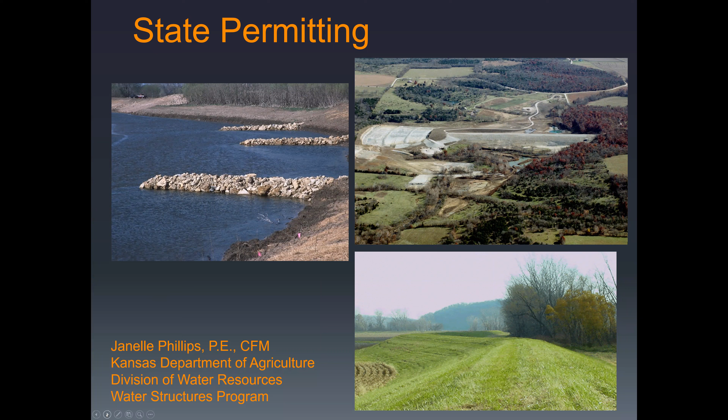So why do we have to have permits? Why do we have to go through this process? There are two laws that the stream obstruction team works with: KSA 82A-301 et al., which is the Obstructions in Streams Act, and KSA 24-126, which is the levee law. Those laws were done at the Capitol. DWR has nothing to do with the laws other than to uphold them.

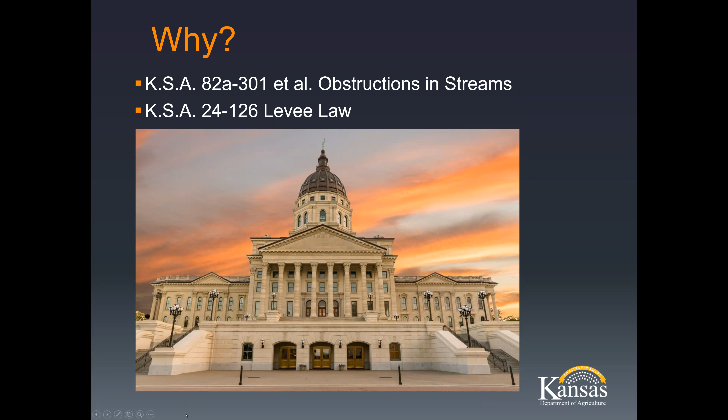So when is a state permit required? For KSA 82A-301 et al., it's construction, modification, or repair of a dam, or work in a designated stream. For KSA 24-126, it's construction of a levee or the placement of floodplain fill within a floodplain.

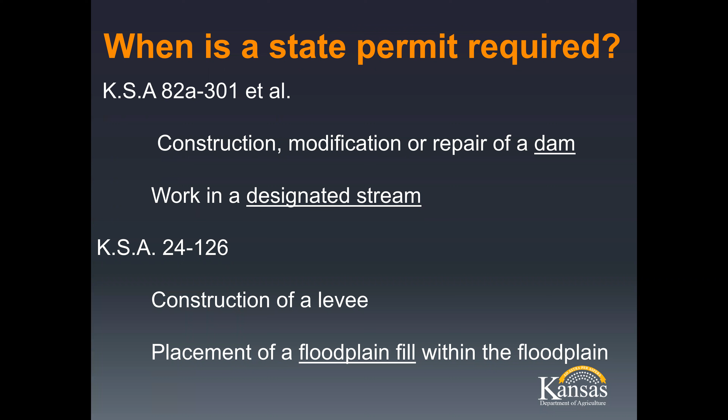So let's start with the definition of a dam. By state statute, KSA 82A-301 defines a dam as a structure that is capable of impounding water and is 25 feet or greater in height, or 6 feet or greater in height and 50 or more acre feet in volume behind the dam. There's a diagram on this sheet, as you can see: the height of the dam is here, and this is how much is behind it.

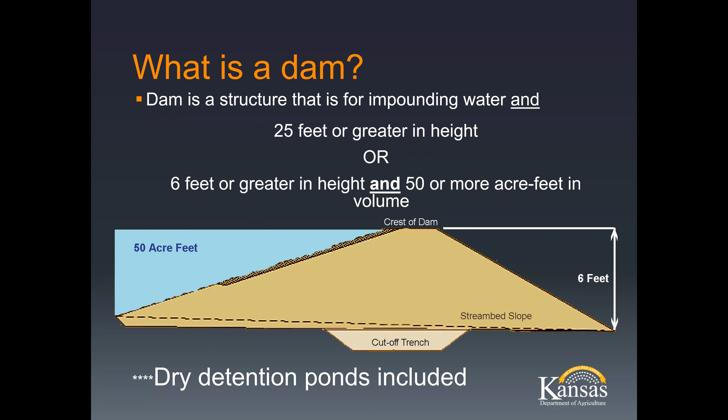For my engineering cohorts, this does include dry detention ponds. So if you are doing a detention pond that will be dry most of the time, but has the capability of holding 50 acre feet behind it, or is 25 feet or greater in height, there is a chance that it is classified as a dam as that is defined.

So what is the difference between a repair and a maintenance? Maintenance is considered removing woody vegetation, seeding and grass, burrowing animal control, replenishment of riprap, and removing debris from the spillway. Types of repairs would be a pipe replacement, a slip line of pipes, embankment modifications, modifications of the dam, or modifying the auxiliary spillway.

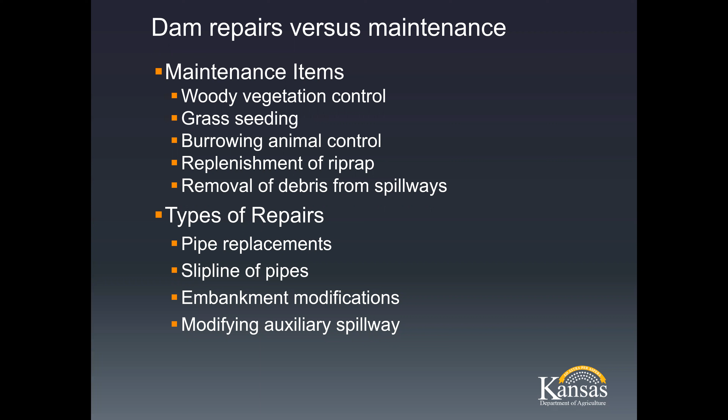So if you have a dam, or someone comes to you and wants to build a dam, the first thing I would say is tell them to get a determination from DWR and the U.S. Corps of Engineers. The second thing I would say is hire an engineer. The reason is, getting permits for dams requires construction plans and specifications by a licensed engineer. So those would be the things I would tell a community to do first: get determinations from DWR and the U.S. Corps of Engineers, and hire an engineer.

In my presentation, I will not go over dam determinations. That is dealt with by our dam safety group, and I think that's a presentation all on its own. But those are the things I would do if someone wants to build a dam in your community.

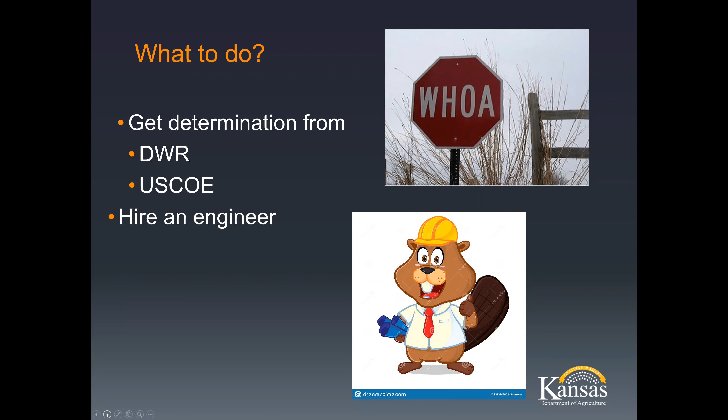Before I go on to anything else, I want to lightly touch on water appropriations. If someone wants to build a pond in your property or community, you should know that anything more than 15 acre feet of storage, or a groundwater well, requires a water appropriations permit. We have 4 field offices for the state of Kansas. So if you know you're going to hold more than 15 acre feet, it might be advantageous for you to contact our field office or our headquarters to ask if a water appropriations permit is required for that particular pond or activity.

So moving on, we're going to talk about work in a designated stream. I think the first thing we need to define is what is a designated stream. A designated stream, outlined in KSA 82A-301, is a natural or man-made channel that drains a watershed of 1 square mile or more in the eastern part of our state, 2 square miles or more in the center of our state, or 3 square miles or more in the western part of our state.

A lot of people ask me, how do I know how much is draining to the area? There is a nifty tool called USGS Stream Stats. You can go to this website, just type in Google USGS Stream Stats, and you can put in the lat long of the location, and it will tell you the drainage area for that location. I will caution you in the western part of the state to take a little more time and look at some USGS maps and other things to make sure it has incorporated everything, but this is a great tool. We use it in our office to find out the drainage area of certain streams.

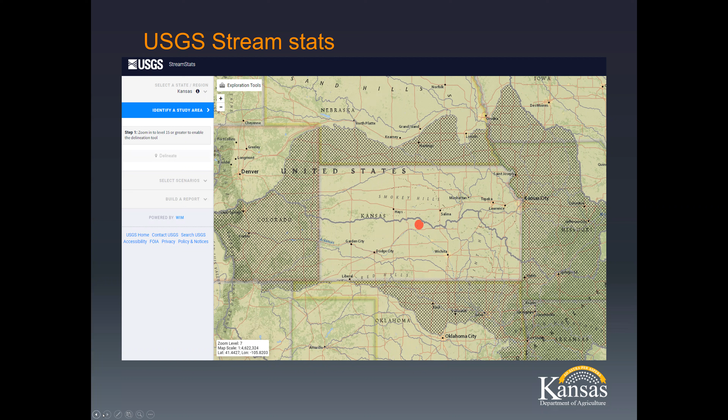So what kind of work? Within the channel of a designated stream, if you construct or modify a stream obstruction, if you modify the stream channel, or if you remove aggregate, gravel, sand, rock, rubble, or dredge within the stream banks, you will need a permit from DWR.

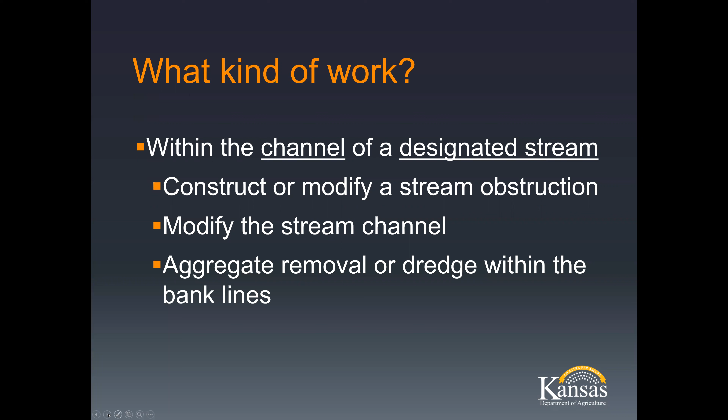To clarify stream obstructions - that could be a culvert, a bridge, a low water crossing, a pipeline or utility crossing, or a temporary crossing. So those construction projects for wind turbines or pipeline crossings, if they have temporary crossings in a designated stream, they do need a DWR permit.

Modify a stream obstruction, or modify a stream channel - so if they're going to straighten the stream, clean out the stream, widen the stream, or do stream bank stabilization or revetment, they will need a permit from DWR. Aggregate removal - if you're going to remove sand or gravel for roads or to sell to somebody else, you're going to need a DWR permit.

So how do I get a permit? I'm going to go through the steps of getting a permit, a stream obstruction channel change permit, step by step, and talk about common pitfalls.

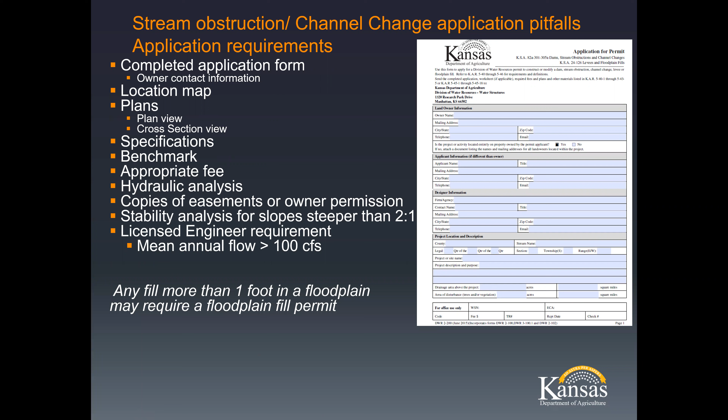A stability analysis is needed for slopes, side slopes greater than 2 to 1 on stream channels. And a licensed engineer is required for the mean annual flow greater than 100 CFS - for the most part, that's our larger streams and rivers. Any fill associated with these applications that places more than a foot of fill in a floodplain may require a floodplain fill permit in addition to the stream obstruction permit.

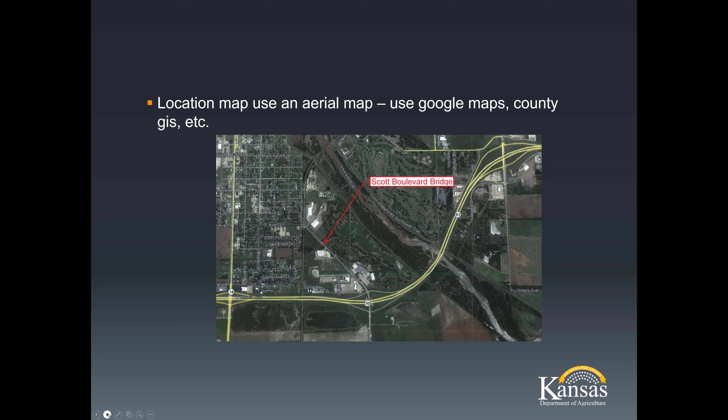But right now we're going to focus on stream obstruction and channel change permits. For a stream obstruction permit, a location map can use an aerial map, such as Google Maps, County GIS, etc. This is for the Scott Boulevard Bridge. A plan view or a top view - this is also the Scott Boulevard Bridge, showing the top view, and then the cross-section view.

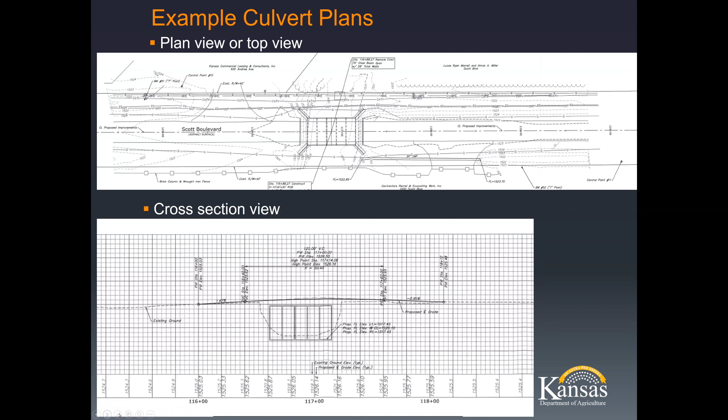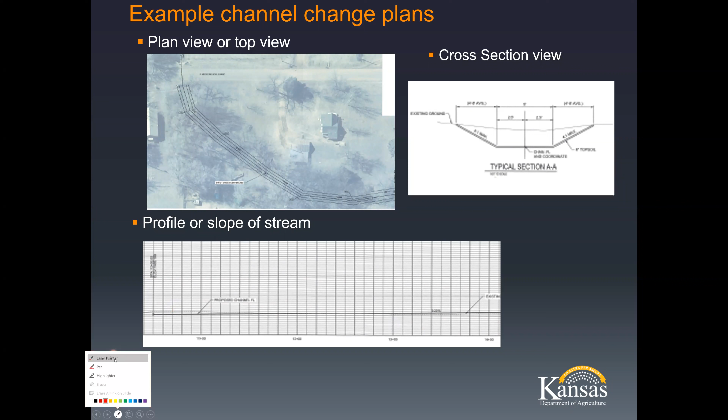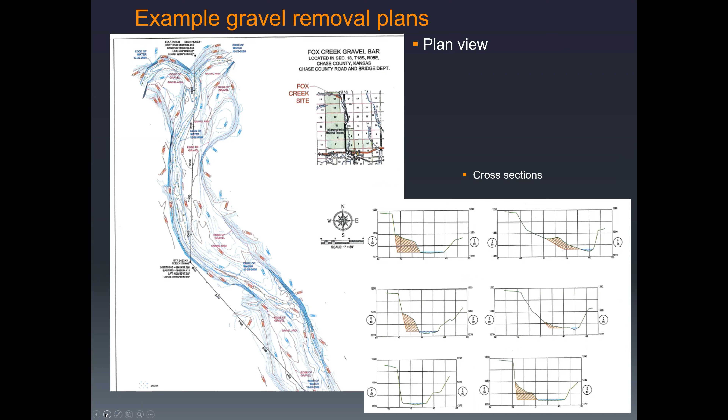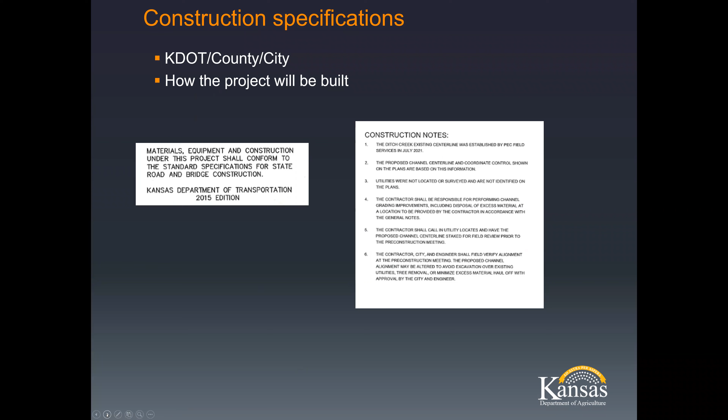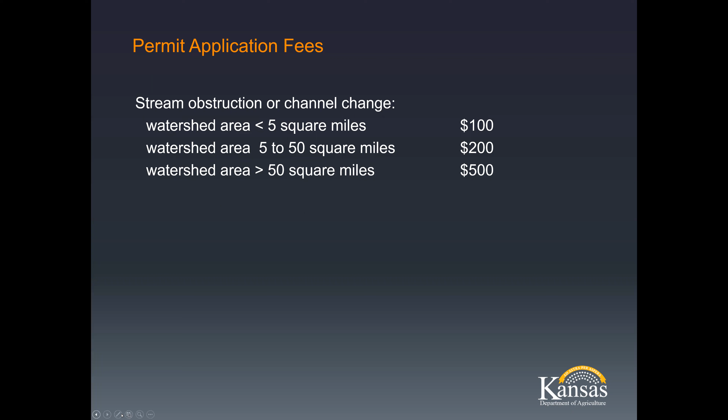Other items that should be included with stream obstructions and channel changes are a hydraulic analysis to show the impact of the stream obstruction, and owner permission or easements. If any work is done on property that is not in your control, we need to know that it's okay with that owner, and if the work impacts another person, we need permission from that entity.

Stability analysis is needed for channel side slopes steeper than 2 to 1, such as retaining walls or concrete walls, to show that it's stable. Also, hiring an engineer: if you're on the Kansas, Arkansas, or Missouri River, you're going to need an engineer.

If the mean annual flow is greater than 100 CFS, then you're going to need an engineer. Like I said before, 100 CFS is usually our larger streams, like the Cottonwood or Neosho. If you're not 100% sure, you can always call the Division of Water Resources, and we'd be happy to tell you whether or not an engineer is required.

You can email applications to kda.waterstructures@ks.gov. All we ask is that you give us some idea how you're going to be paying for the application.

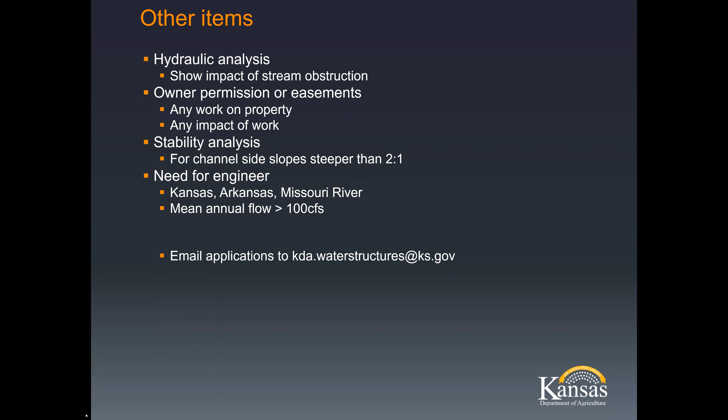There is a caveat in our rules and regulations about general permits. General permits are for smaller impact projects. These include bridge and culvert replacements, sand and gravel removal, and pipeline crossings by open trench.

For bridge and culvert replacement, if the cross-section area is the same or larger, has limited channel work, and the road grade is not changed, then it could qualify as a general permit.

Sand and gravel removal: if the drainage area is greater than 50 square miles and is limited to 100 cubic yards per year, you could apply for a sand and gravel removal general permit. We see this a lot with our producer friends that are just using gravel for their own roads or stock ponds.

For pipeline crossing by open trench, if the drainage area is less than 50 square miles, no permit is required as long as the pipe is 5 feet below the stream bed.

If the drainage area is greater than 50 square miles and a permit is required, it can be done by general permit. It has to be 7 feet below the stream bed on the Arkansas, Kansas, and Missouri rivers, and 5 feet below on any other stream.

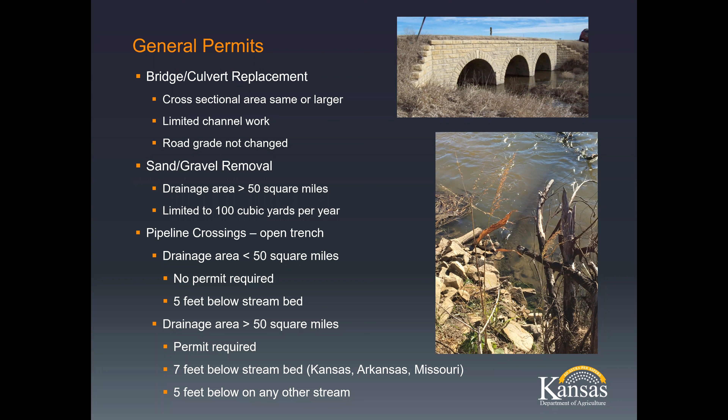If you think your project qualifies for a general permit, you need to submit the previous application we showed earlier, plus this 2-196 worksheet that's shown here.

The one caveat is that the road is not raised by more than a foot. A lot of people get tripped up by this. You must be sure that when you're putting in a new culvert or changing that bridge to a culvert, you're not going to raise that road by more than 1 foot.

Plans are required: location map, plan view, road cross section. If you are in zone 1, it's greater than 4 square miles. Zone 2, greater than 6 square miles, and zone 3, greater than 8 square miles. This is all outlined at the very top of the general permit worksheet.

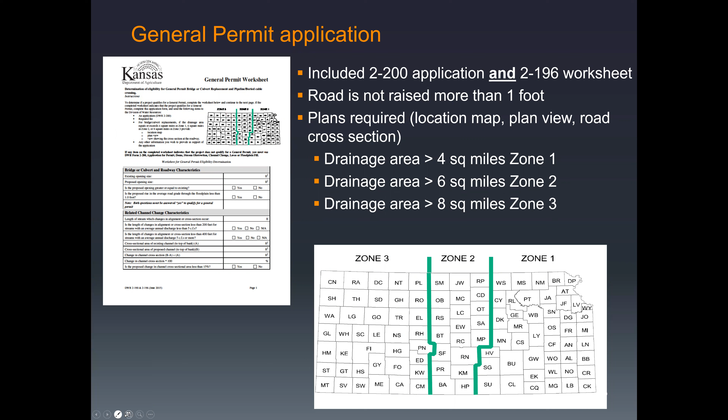This is a zoom of the actual worksheet, and the reason I'm showing it to you is because it's very important that this is filled out to the best of your ability. If you just put in the existing opening size and don't fill anything else out, it could slow down our review process.

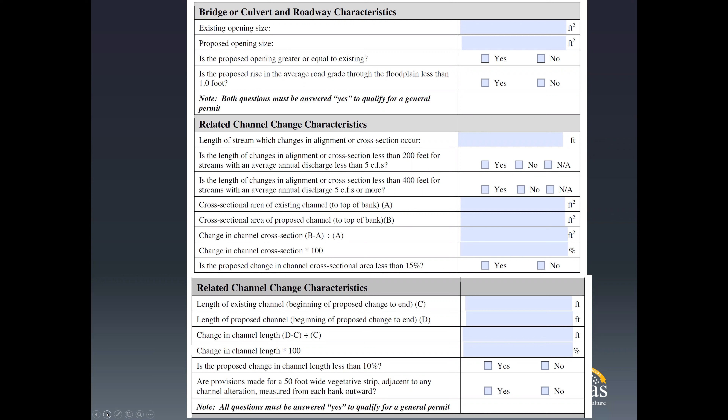So with that, I'm going to move on to floodplain fills, KSA 24-126.

Fill within a floodplain - so what is fill? As defined by our regulations, fill is material, soil, rock, or rubble that is placed in a floodplain to an average height greater than 1 foot. That picture to the side there is definitely floodplain fill. Examples are levees, building pads, wetlands or duck marshes, and aggregate and soil stockpiles.

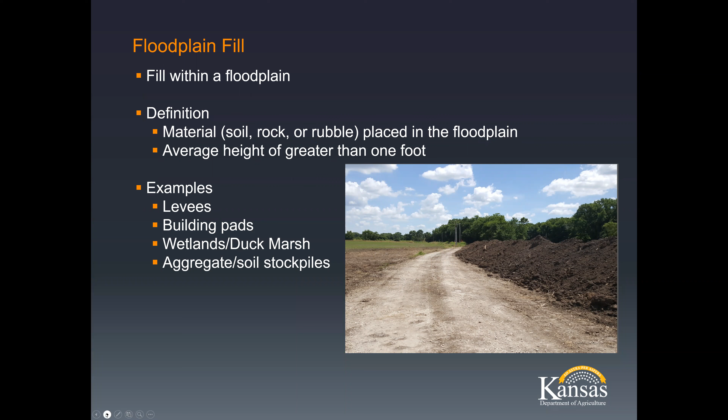So how do I know if something's in the floodplain? You can use the FEMA Map Service Center. We use it too, to put in the address or the lat and long, and find out if the location of the proposed fill will be in the floodplain.

You can follow the directions: go to the map, put a square around where you want to know the BFE, and submit it, and Patrick will give you an answer about what the BFE is. If you need a map, or a hydraulic analysis or HEC-RAS model, you can do the same thing through that map, and Joanna or Bill will give you the best available data we have for that HEC-RAS model.

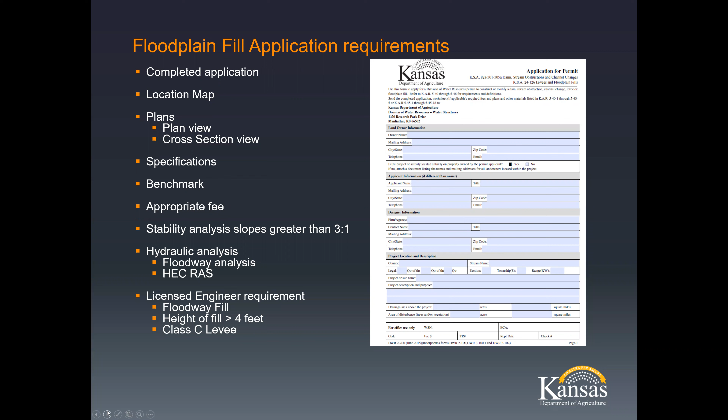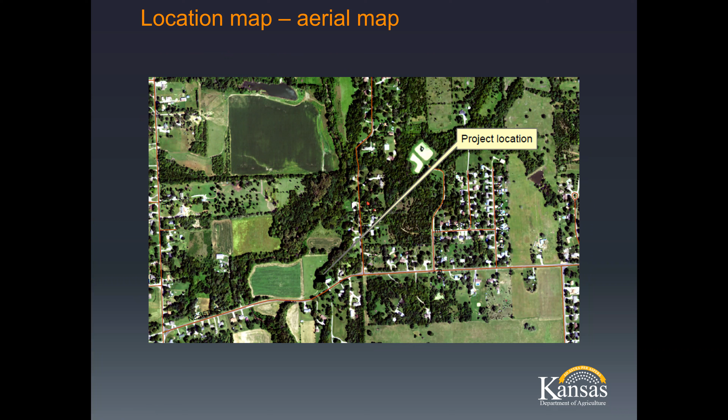Here's an example of a location map, this one for a building pad. This is a grading plan with contours. We do ask for a grading plan with contours; you can use LiDAR data, which is available for every county in the state of Kansas. The cross-section shows us the proposed grade versus the existing grade. It shows us the side slopes, and it shows us the top so we know if you're above that BFE, along with a lot of other information.

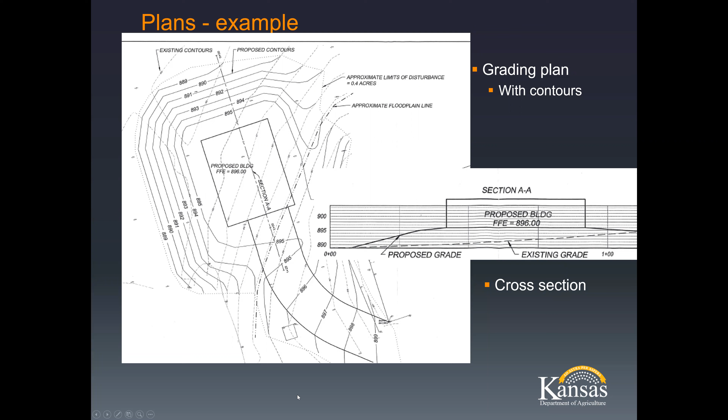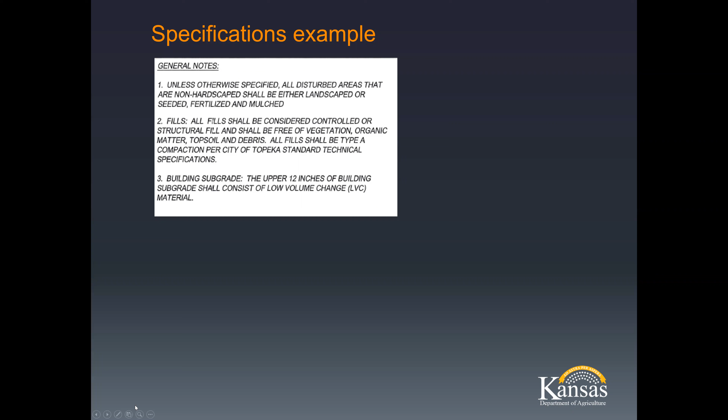So permit application fees, again, these are dictated by the legislature. DWR has no control over the fees. For a Class A levee, for those of you that don't know, is usually what's termed an ag levee. Those are levees that if they were to breach, nothing but agricultural land would be harmed.

Before construction is $100. After the fact, meaning that you have violated the law, it will be $200. Class B levee is a levee that if it were to breach, some agricultural buildings or some minor buildings would be harmed. It is $300, and after the fact is $600.

A Class C levee is one where, if it breaches, people will be harmed. Example: the city of Topeka has a Class C levee, and the city of Manhattan has a Class C levee. There are other levees out there. It's $500, and if you do a modification without getting proper permitting, it's $1,000.

Floodplain fringe fill is $100, and after the fact is $200. Floodplain fill in a zone A without BFE determinations is $300, and after the fact is $600. A floodway fill is $500, and after the fact is $1,000.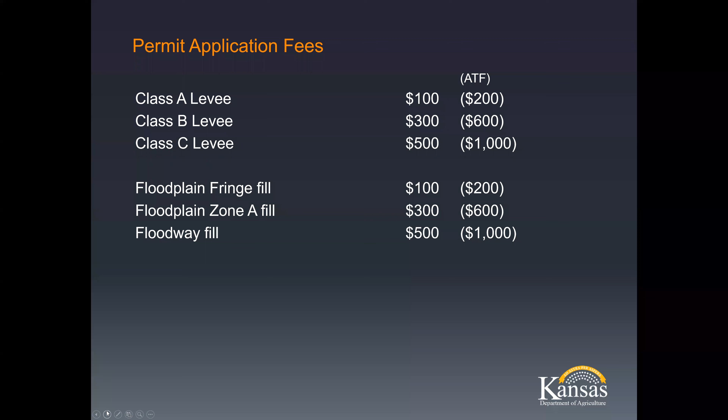Other items that are required include a hydraulic analysis to show the impact of the fill. These are required for all applications except for placement of fill in a floodplain fringe.

Owner permission or easements: if any of the work is on somebody else's property, or any of the impact of the work is on somebody else's property, then you will need an easement or that owner's permission in writing.

A stability analysis is needed for fill with side slopes steeper than 3:1. So if you're using a retaining wall to hold up your fill, we will need a stability analysis to show that the fill will be stable using that wall.

The need for an engineer: again, if you have a Class C levee, you will need an engineer. Fills higher than 4 feet require an engineer, and fills in the floodway will require an engineer to sign off on the plan.

You can email applications to kda.waterstructures@ks.gov. Again, we will need to know how you're going to propose to make payment. We will not process applications unless we receive payment and enough information to start the application review.

So let's talk about projects that have both. If a project has a stream obstruction or channel change and a floodplain fill, take the higher fee. I'm going to use an example over here.

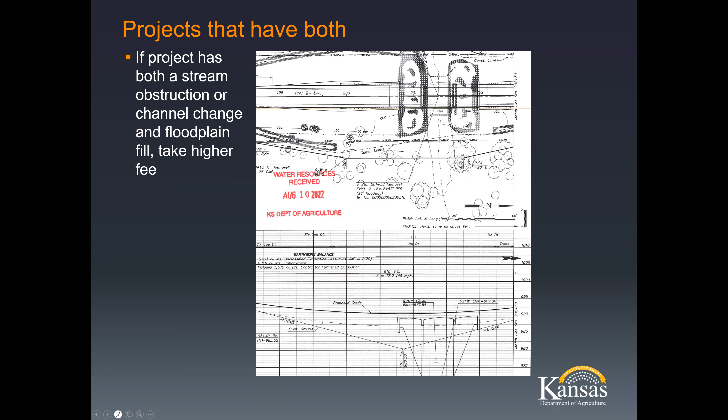Let's do an example. Say that stream obstruction drainage area was 4 square miles, with the road raised more than 1 foot in a Zone A. We know that less than 5 square miles is $100 in fees. However, floodplain fill in a Zone A is $300. So what would be my fee? Well, it would be the higher of the two, which is $300.

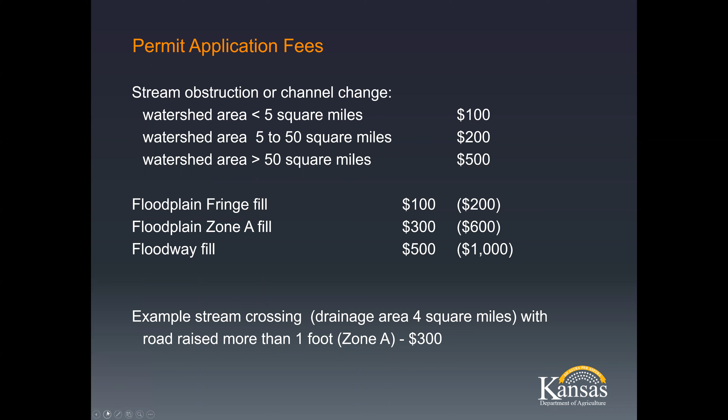I get this question a lot: does everybody need to get a permit? Yes, everybody needs to get a permit. Any person, partnership, association, corporation, agency, or political subdivision of a state government — KDOT, cities, counties, levee districts, townships, etc. — require permitting from DWR. No one is exempt from getting permitting. I would say the majority of our permits come from KDOT themselves, with second to cities and counties.

Another question I get all the time is how long does it take to get a permit? KSA 82A 325 through 327 by the Kansas legislature says that all applications, stream obstruction and levees, must go through a mandatory 30-day review. That gives a chance for 7 agencies — Kansas Department of Wildlife, Parks and Tourism, the Kansas Forest Service, the State Biological Survey, the Kansas Department of Health and Environment, State Historical Society, the Kansas Department of Agriculture Division of Conservation, and the State Corporation Commission — enough time to look at the application to see if there's any impact to their concerned areas.

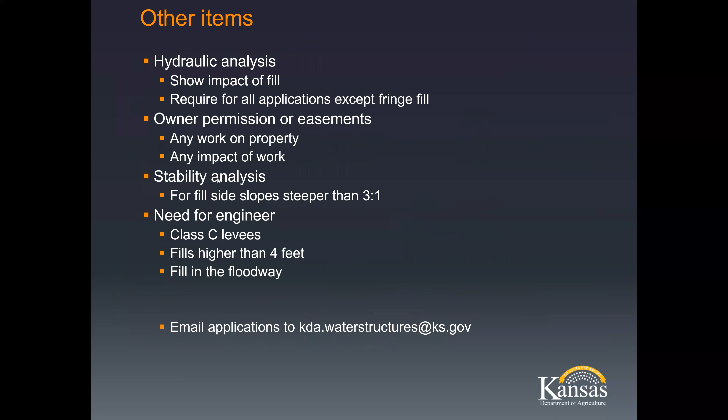I see one question that came in as a direct message to me: would yard trimmings and leaves be considered fill? No. Rock, rubble, or concrete would be. So no, lawn trimmings and leaves are not considered fill.

There's another question in the chat: how are channel bank stabilization projects handled? The majority of them require a state permit. If the person is going to place rock on the existing bank as it is without doing any bank work, then it is exempt from permitting. But the majority of projects want to stabilize that bank before they dump concrete on there, so I would recommend that they get a determination from the state and from the U.S. Army Corps of Engineers before they do any work.

Another question is if the permitting fees are standard across the state. Yes. There was another direct question to me about whether the PowerPoint will be available to refer back to.

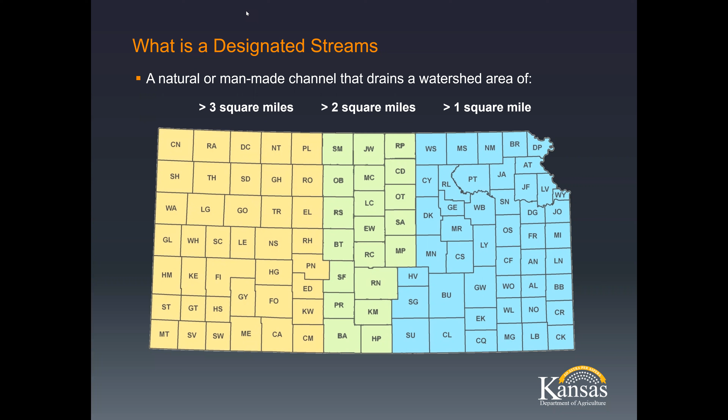Another question: can you expand on water wells for municipalities? Certainly. I am not a part of the water appropriations group, but if you have a water well for a municipality, I respectfully request that you call the field office about your concerns, and they can handle it from there. The ladies and gentlemen who work in those field offices are very familiar with your area and will be able to answer any of your concerns and questions.

Another question is if railroads are required to get permits. I knew somebody was going to ask that question. So they're not required per federal law. However, the majority of railroads do work with DWR and counties to get permits.

Another question: does a project that needs a floodplain fill permit that has stream crossings required for construction also need the stream crossing permit? Yes, if they're crossing a designated stream.

I think this one is asking about the time frame for record retention with the permits - if there's a required time frame. So we do respectfully request that any permits that are issued are filed with the county Register of Deeds on your behalf, that way they're associated with the property. DWR retains all permits under our records. I think we have permits dating all the way back to 1930. They're not as easy to read as I would like, but we do retain all the records. But if you have a property and have a permit, we do respectfully request that they be registered with the property under the Register of Deeds.